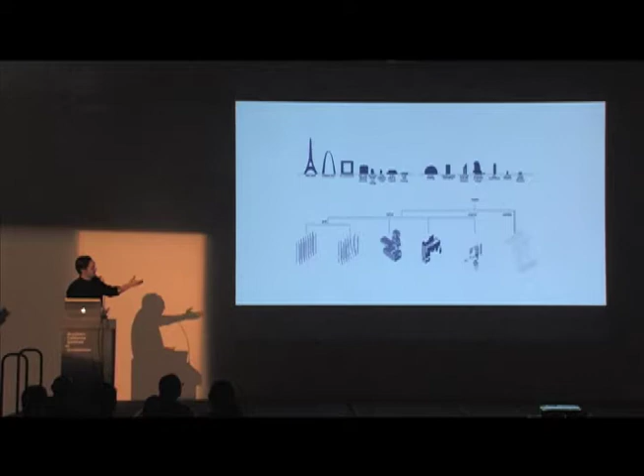We got an honorable mention, which is basically the jury's way of saying 'interesting idea, but there's no way we would ever do that' - which is ironic because they didn't actually end up building anything anyway. The winner didn't go on to build it either.

This was right about the time that Scott and I parted ways, and I went out on my own. Like so many people in this moment, I started to get work in China, and I got that work through a big landscape and urban design firm called SWA. They hired me as an architectural design consultant.

The very first project I worked on - I say we because there are always collaborators in the office, regardless of whether you have a partner - there was a decommissioned cement plant in the district of Qingpu, outside of Shanghai, and they asked us to do a study to look at possible reprogramming and an architectural proposal for the cement plant.

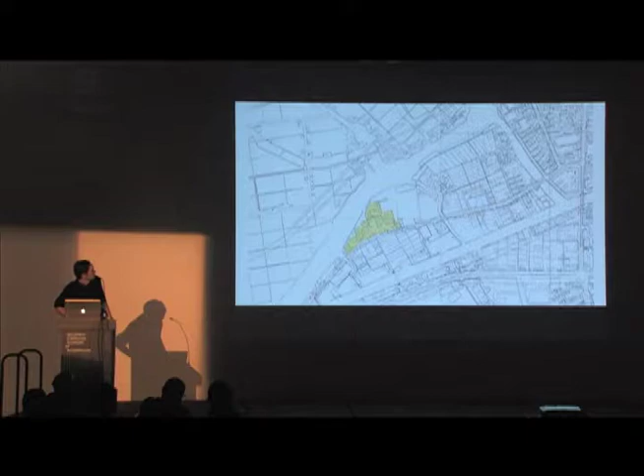It was, I want to say, about a couple 100,000 square feet. And it looks something like that.

So when the client tells you that you have 200,000 square feet to work with, we felt it was a good idea to go ahead and make a proposal for 1.2 million square feet, actually proposing for the entire island - which SWA was incredibly receptive to. We created a new simple zoning plan where we zoned about a third of the island for cultural use, with a band for housing, a major vehicular spine moving through, pedestrian connections, and a major pedestrian connection.

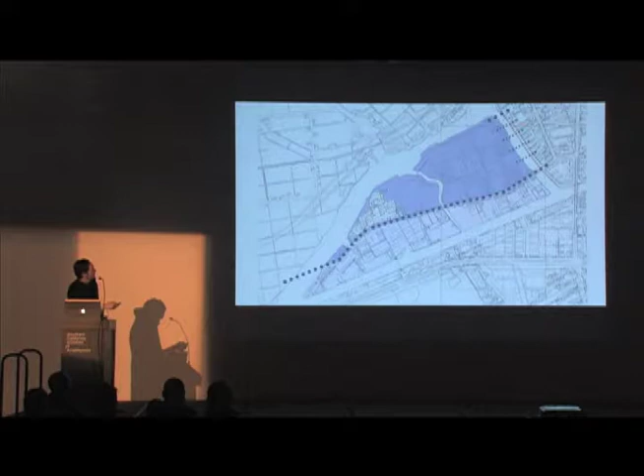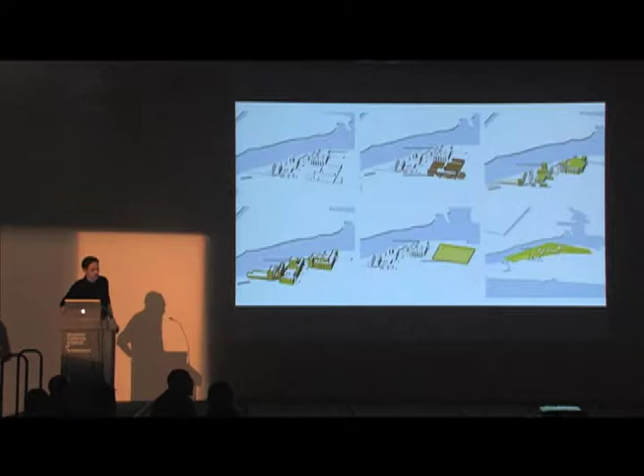At the same time, we were looking at different ways of dealing with the cement plant itself. In one instance, we'd leave the cement plant intact, like a post-industrial relic, and add program. In another, we'd insert program inside. Another would wrap it, negotiating between the two. In one it would be demoed with all new program, and another would have a big encompassing roof plan, like Tschumi's at Le Fresnoy.

So this was actually the result. It's interesting - while so many of my peers in the profession were getting stuff built so rapidly in China, our proposals for China somehow never got realized. So we had the golden touch on this stuff.

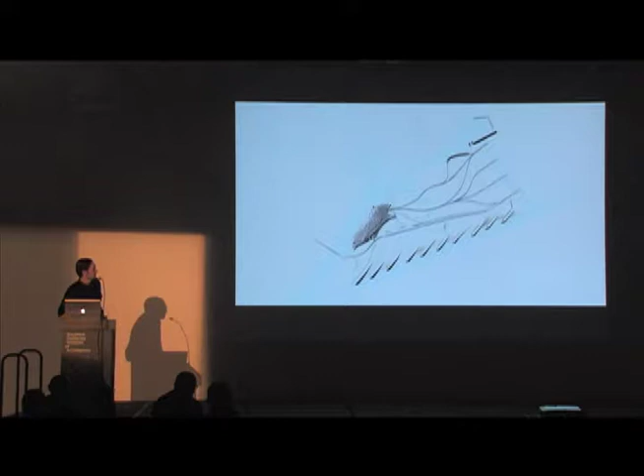So a little bit down the way in Qingpu as well, we were commissioned to look at a park and a series of pavilions within it. At this point we were really interested in the idea of the park as a kind of deformation field. There was a pagoda in the park that was a point of interest throughout, so we did a series of pavilions or tea houses that referenced the pagoda and referenced this deformation field we had created based on those relationships.

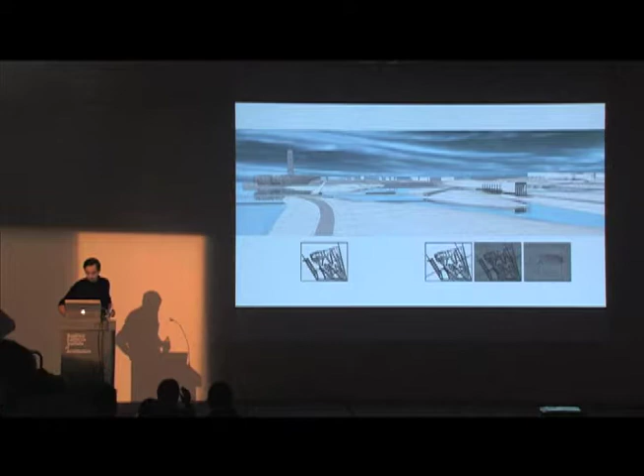We actually made it to DD on these things, and we worked with Arup on the curvilinear screen structures to form a bent steel pipe system with teak cladding. We had pages and pages in the DD set describing the curved rib relationships, along with Excel spreadsheets describing all the relationships. But again, as happened with some of the work in China, it just fell into a black hole and nothing ever came of it.

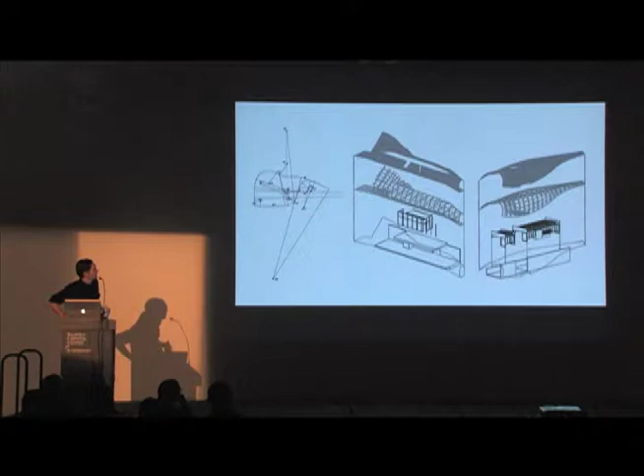This was my installation in the gallery at SCI-Arc, and I think for me this is a really key, really important project in the trajectory of my career.

It's a little bit of a blessing. It was an amazing opportunity. It also makes me feel like a one-hit wonder—it's the one thing everyone can agree on. They say, I loved your installation. Everybody says that more than anything, which should be a compliment, but I'm so insecure I always feel like what they're really saying is everything else you've done is total shit. Not that I don't want to be complimented, because I do appreciate it, but let's keep going.

At the time we did the installation, I collaborated with my former partner, even though we had separated. I was really interested in this idea of ubiquity and the everyday, and the beauty of the everyday—the fact that there are opportunities in architecture that surround us but are continually overlooked. One of those was this kind of Mad Men moment, this 1960s drop ceiling, which is absolutely ubiquitous, it's everywhere. So I thought we could use the drop ceiling as a framework for exploring patterns and exploring a condition of a surface.

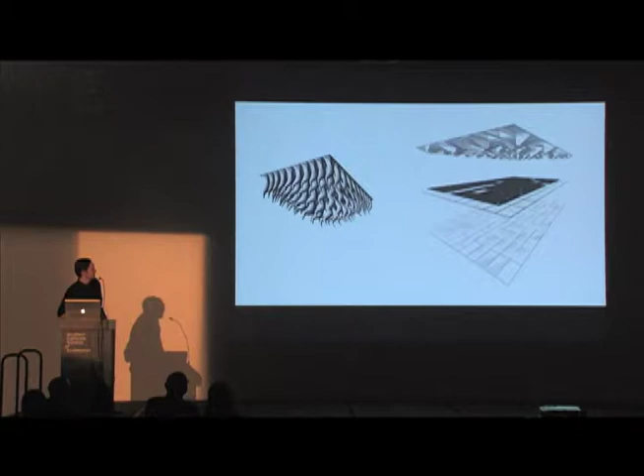But I'm still going to do the other one at some point soon. So we created what we called space scores—a kind of double binary set of options for each unit or cell, meaning it could be set in one position or mirrored, or flipped upside down and mirrored from that. We also dropped them onto the floor as part of it, using a set of operations to create these space scores.

The thing was up for 9 weeks, which was in the summer—I think that's a bit longer than they actually stay up—but we actually went in and manually changed the exhibit every week for 9 weeks. So if you came at a different time, you would see a wholly different thing. That's just a kind of annotation of the space score, unit by unit, and then those are the results over the 9 times.

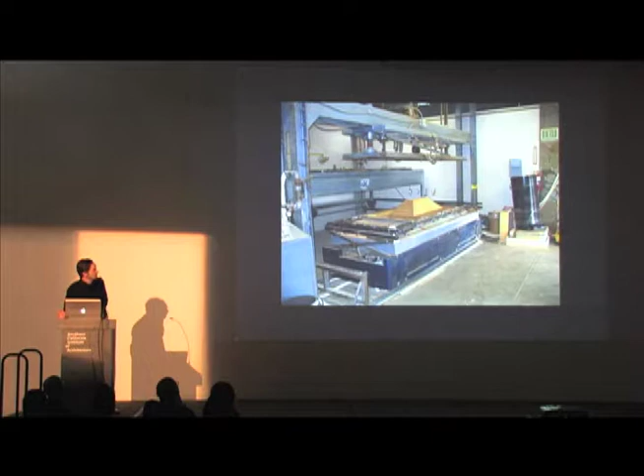One of the things I think was amazing about this project is that we did everything here. We made a couple bucks or molds for vacuum forming, and we vacuumed all 121 parts here at SCI-Arc. We did some R&D with a company of specialists who did 3 or 4 and showed us the tricks, which was really helpful. Then we pulled all 121 parts here—we may have pulled 150 to get 121, but we got our 121 parts.

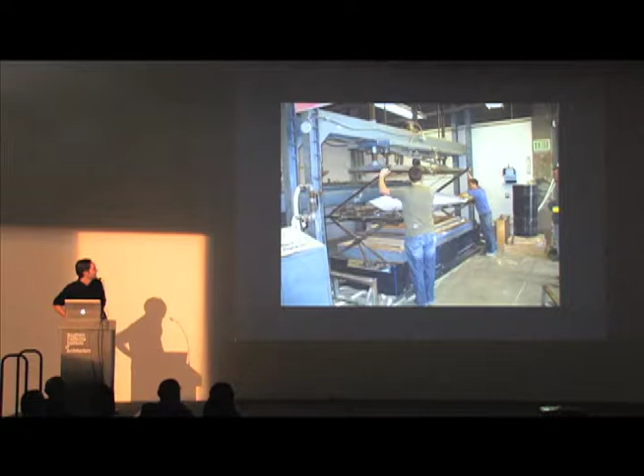And that old—I don't know how it's still working—but that old dinosaur of a vacuum form machine was absolutely perfect. It was brilliant.

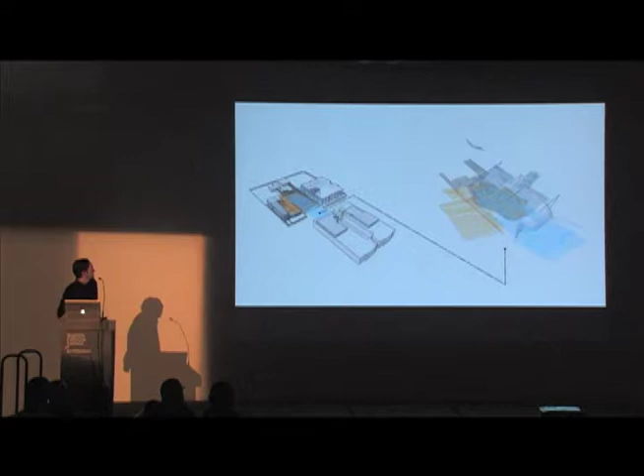This is a diagram of that reconfiguration of the program. The other thing we did was a simple building height relationship analysis and view plane analysis, and we used it, for better or worse, to build up this surface that became a kind of crusty protective shell around the existing house.

At the same time, we did some analysis of the landscape, the garden plan, and I was really interested in working that and mining it for possible patterns. At the time we were using Voronoi script, which we never actually used again for a number of reasons, but I think it was an interesting experiment.

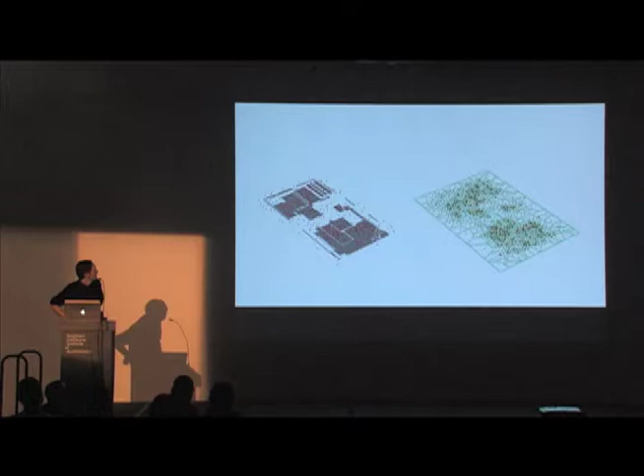We started to explore what that pattern might mean in relationship to a new kind of lightweight structural shell. At the time we were conceptualizing this lightweight space frame, and had a number of vertices coming together that at the time was impossible. But now, thanks to Alexis, I actually think I could build this thing with Alexis's robot joint.

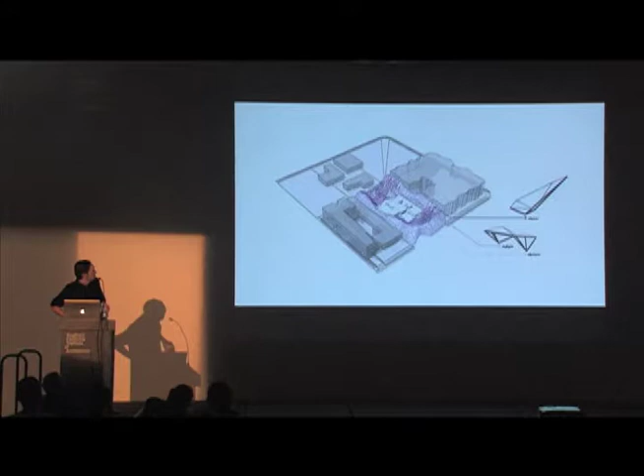This is a cutaway section showing how we explored the possibility of the lower level and this crusty shell encapsulating the house. This is as far as we got, but we did a slope analysis to decide whether the shell would be pathway, garden, or skylight. Obviously this is not a super respectful treatment of the existing house.

So the next thing I want to talk about is a series of residential projects that were happening in the office in much more recent timeline.

This project is interesting in that it was an existing one-story residence, but once you get up to the second level, you actually have sweeping ocean views in both directions because of the shape of the landform in Dana Point, because of the point.

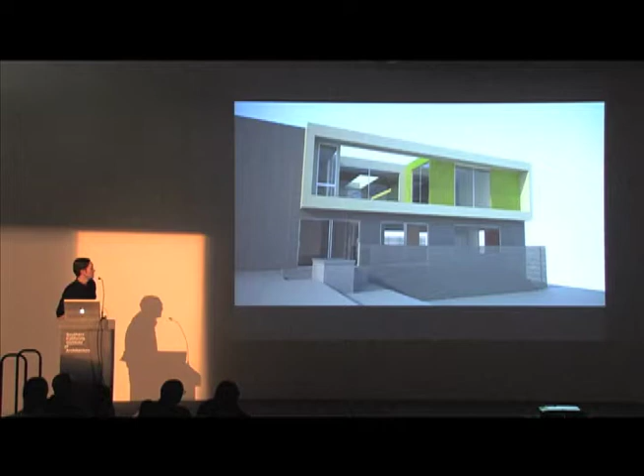So this was the proposal. It's really a very simple modernist proposal, which in and of itself was actually a really tough sell, but we got there.

And then this was the kind of renderings for the interior and the exterior. I'll talk a little bit more about this later on.

So this is something I've talked about before, but I'm sure any architect or anyone in architecture school has had the experience where you tell someone you're an architect, and the uninitiated's response is always, 'Oh, really? When are you going to design your dream house?' I don't know what they picture when they ask that, but it's clearly not what you're picturing or what your reality is.

My wife and I actually purchased a piece of property in Mount Washington in 2005 to build a house on, and it's no dream house, let me tell you—it's a reality house. It's a 2-to-1 slope, a substandard lot, only about 4,000 square feet. It's a difficult site in kind of a crappy neighborhood, to tell you the truth, because that's what we could afford. So it wasn't our dream house by any stretch of the imagination.

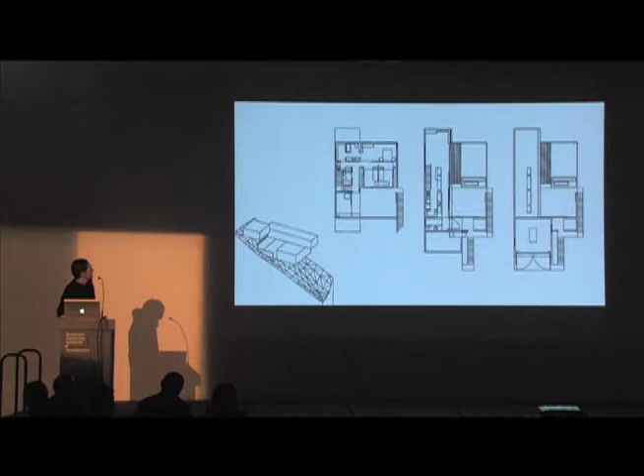But anyway, I wanted to show this — I think it's actually the better of the three or four schemes we did. You enter on the upslope at the garage level, and kind of enter under the garage into the main space. The public space is this long, thin bar, only 16 feet wide, which holds the kitchen and living space, and sits on top of a more rectangular chunk that holds all the bedrooms and forms a kind of roof deck.

So that's the rendered version of that scheme. The site's not quite as steep as it looks, like you're flying in an airplane, but it looks cool in the portfolio.

So these projects were all happening at the same time. This is another residential project for a couple, about 2,500 square feet in Escondido, California. Let's see — you can spot the architect house here. So that's the actual project.

This one actually did get built, although pretty severely compromised. Part of the reason I show the aerial is to give an idea of what we were up against — there's an ocean of these faux mission-style homes, as far as the eye can see. We were in an architectural review board controlled neighborhood, meaning the neighbors have to approve the work you do, and suffice to say, they want you to do all the things that are already in the neighborhood.

So we got rejected a lot — many times we went through the process and were rejected. But eventually we came around to something that would work. Let me go to the plan here.

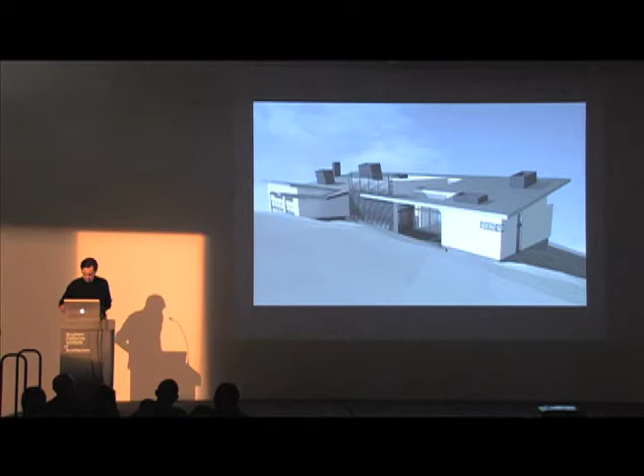And then we did that, and it was unanimously approved. I don't know if you can tell, but it's the same project.

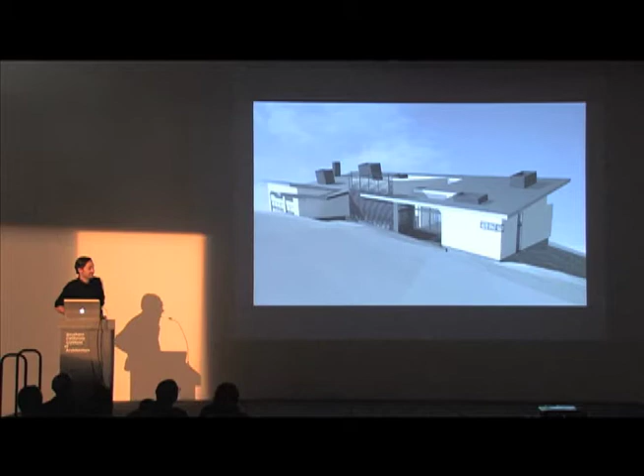But as you'll see later, this doesn't always work. We got it approved, and the house actually did get built, which was good. But all the exterior screens and material changes and all those things we absolutely drew the shit out of were cut from the project, unfortunately. With that said, the shell and spaces are really good, and the clients are incredibly happy.

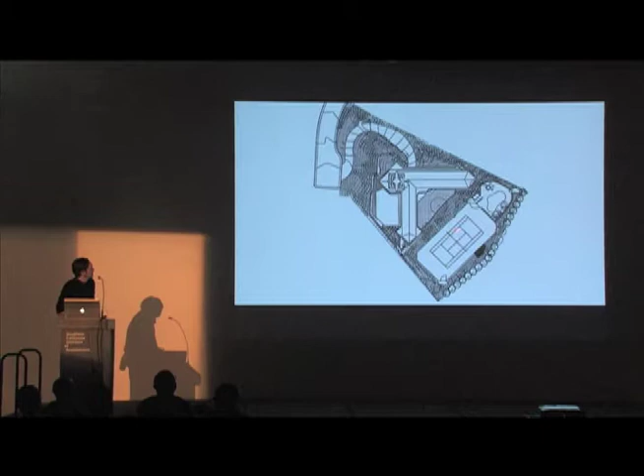So that's the kind of result - the restoration of the original house, and then the new cushion of greenery. One of the things we did, in addition to redesigning all the landscape, was to create this decomposed granite and corten pathway that loops all the way around the site, so you can actually experience the whole site, which you couldn't do before.

So this is an amazing, absolutely incredible house. One of the things we wanted to do is bring it back to its original vision, which wasn't the case when we started - the house kind of floating on this cushion of landscape and appearing to hover. It's actually set into piles in the mound, but you can see the twinkling lights of Redondo Beach beyond. You learn a lot when you work on a project like this, in terms of fits and finishes, but also the geometry and the siding - it's a really incredible project.

So the next project is for the same client, when they just couldn't bear anymore the 180-degree views of the ocean, and had to get away from it all. They actually go to Ojai, California, and own a property there as well as the one in Palos Verdes. They asked us to look at their existing getaway property in Ojai, which is here - again, another spectacular site. I think the original zoning plan had the land broken up into like 20-acre parcels. This project is like half an acre, because it was actually broken up prior to the ordinance. But what it affords is that when you're here, you have amazing views of all these orchards and the entire valley beyond, which runs east-west. You really feel like the property is kind of limitless in a way, which is pretty amazing.

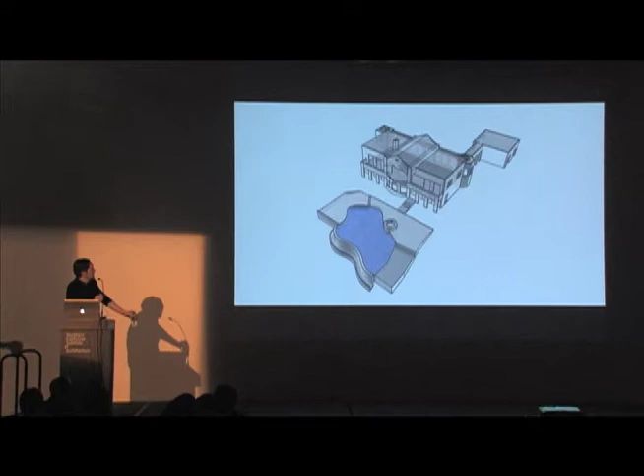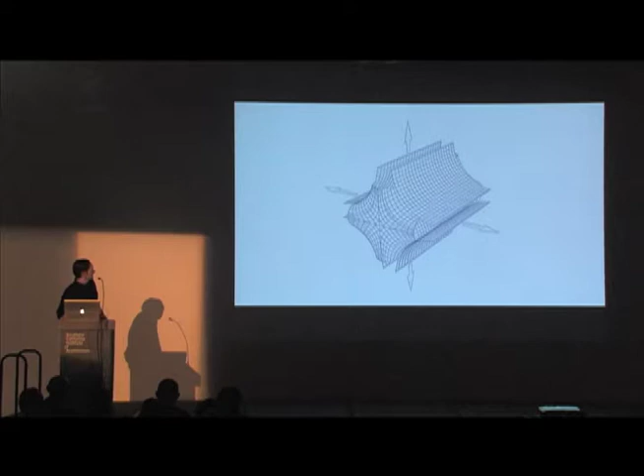At the time, we were looking at different geometric constructs and minimal surfaces, not as a model for modeling the house specifically, but as a way of thinking about the space. So we were looking at cross troughs, and we made up this thing we called the double cross trough, which allows for penetration up and down, and side to side directionally. It became a model for thinking about the spatial connections of the house.

So in the design, we just blew up the Postmodern Misfit. We kept the infrastructure on the base, which was retained and set into the hill, and then redesigned the upper part entirely to work within that framework. One of the things we did, in addition to the whole upstairs, was to move the garage and tuck it under the house to get more of the landscape.

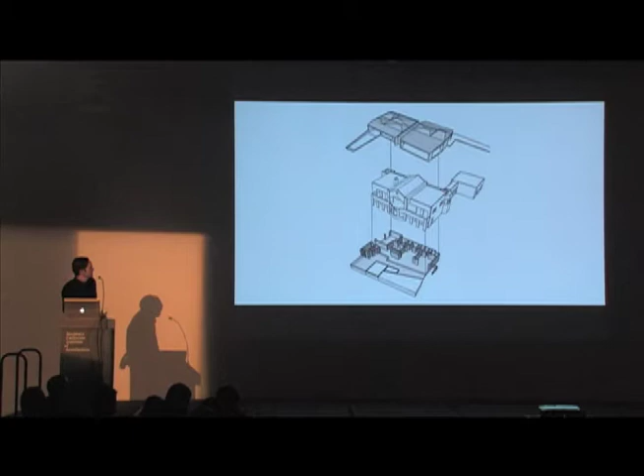So basic diagrams showing the way the new scheme would work in terms of programmatic breakdown. We would have private spaces on this side of the upper floor and public spaces on this side, with still private in the bedrooms below. So natural ventilation, circulation, and then back to the plan.

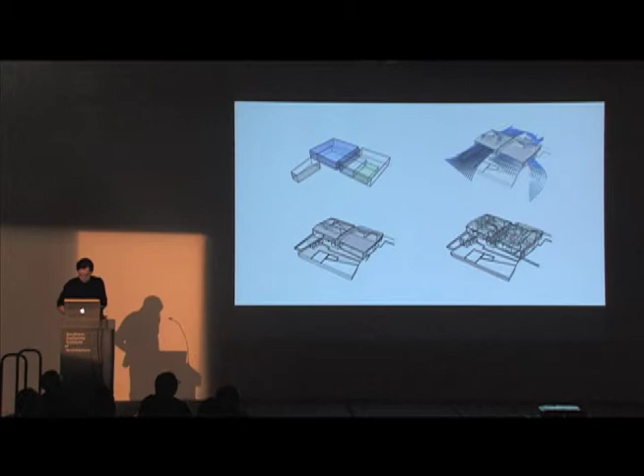Base level plan, and then the upper level with the spaces breaking down the way I was describing. So in addition to the house and the site, they actually commissioned us to design a detached office across this ravine, and also a small guest house.

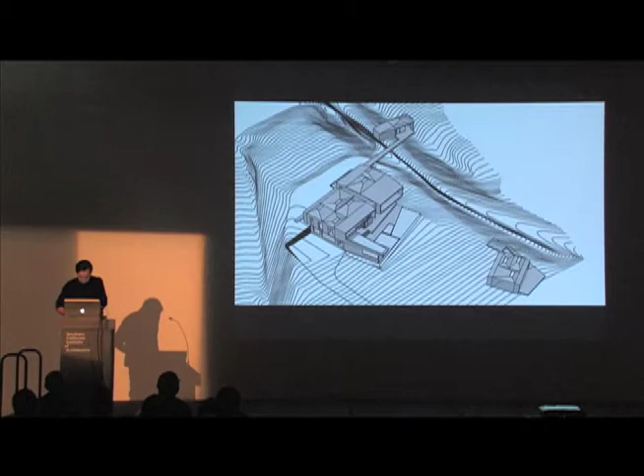And then I think this is the last residential project that I'll show. And again, all these things were kind of happening at the same time.

So through SWA again, we were hired to look at a development in Krasnodar, which is in southern Russia. The idea of the development was that the developer wanted to create a kind of resort community, but also wanted to bring golf to Russia, which I don't know if that's a good idea or not. They don't have golf in Russia, or they didn't at the time, so they wanted to create a big golf course with a ton of residences around it, kind of vacation getaways, but the developer hoped at some point they'd turn into permanent homes for residents.

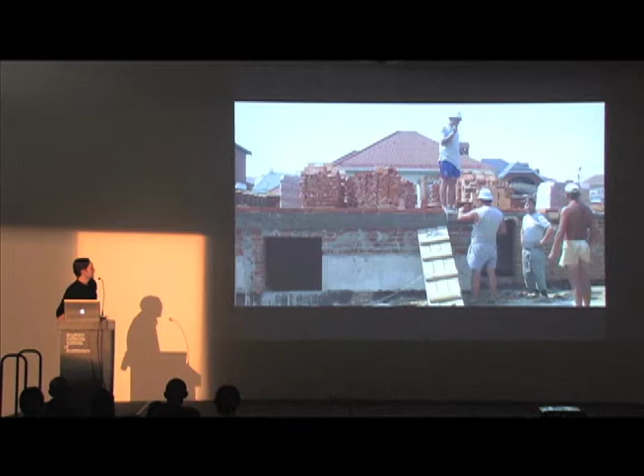But beyond just the nature of the crew is the nature of the construction. It's masonry, very poorly done, entirely masonry, and they were creating these dense, heavy structures with very minimal openings in a climate that's not so dissimilar from ours. Actually it's a very wonderful climate they have. They're not very far from the Black Sea. It's in the southern part of Russia.

So to me, it's a weird evolution of a type where the construction technology trumps, in a way, the reality, let's say the ecological realities of the place.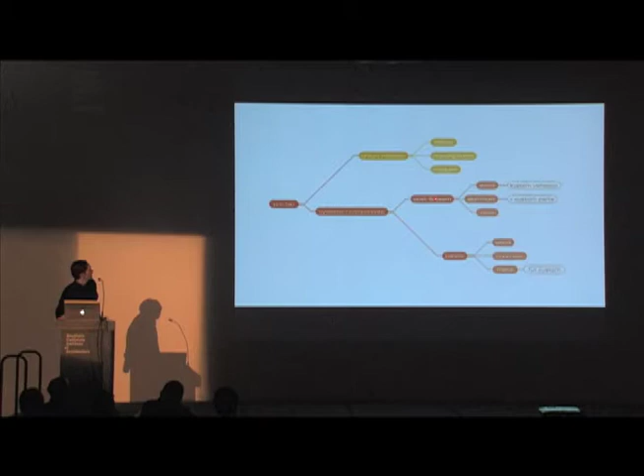So the client asked us to look at prefab, which I have to say made me cringe a little bit, but definitely a lot less than that. The thing about prefab is that when you say it, it's hard to know what someone means by those words. So the first thing I did was to educate the client about what prefab actually is. We talked about a system, a kit of parts approach versus a unit or module approach, the possible results, and the material and tectonic realities of the different systems.

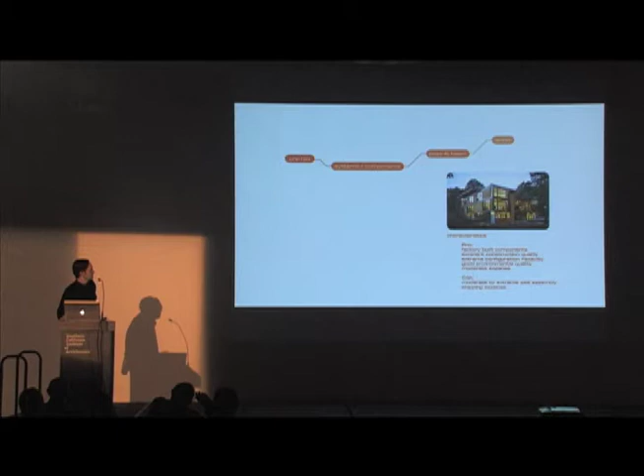The client was really excited that we engaged Empyrean, the kit of parts company that had done the Dwell Home. Empyrean was incredibly supportive and great to work with, and they're excited about partnering with architects, but I really knew we didn't want to do the next Dwell Home.

But that's okay. What we did was set about educating ourselves on the system, the absolute requirements of the Empyrean system. It's really simple — a simple post and beam system with panelized or unitized infill. And then they have these really strict criteria about what you can do with the roof.

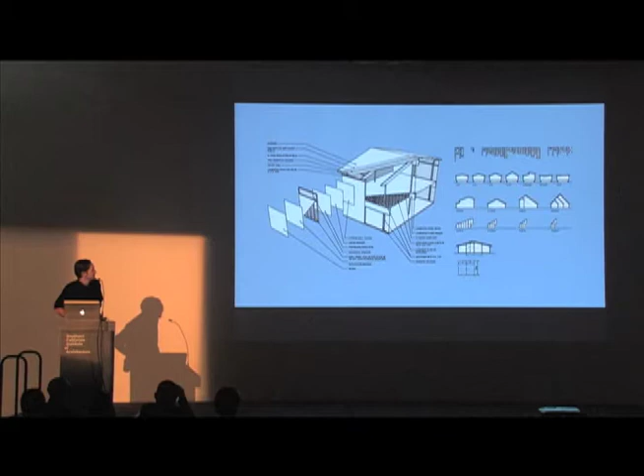So obviously the first thing we explored was working with variability in the roof pitch, maybe creating something with more of a profile of a continuous ribbon, which Empyrean was absolutely thrilled about — they said it works with our system, all systems go. So we showed these things to the client, and they didn't like them.

Well, they did, but they said people wouldn't like them. So we were struggling. I thought back to my experience with the Garrison residence, and thought maybe if I show them something a bit friendlier, they'll like it.

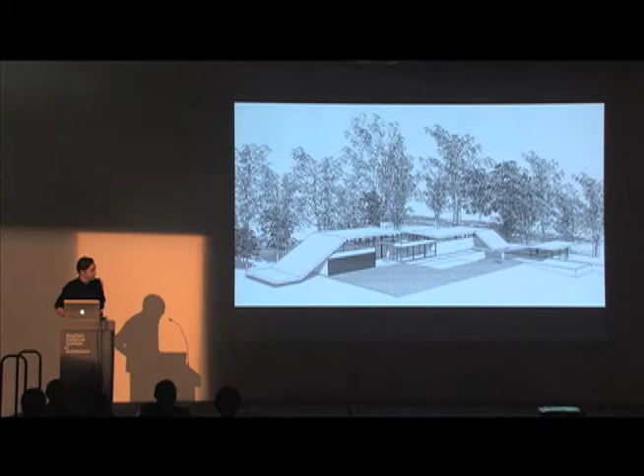So we started to show them these things which I would never show my peers, but here I am showing my peers. We showed them things that were a bit friendlier, populated with people and trees and those things. But the design obviously isn't changing at all.

Little did I know that everything was also going to stop all at the same time. So I did that, and then we got that. So let's take a survey. We had these six projects all going at the same time, and among many other things, at different scales, but this was the kind of core of the work.

This project actually got built, but the funding was cut during construction, so they built the shell, but all the screens and finishes and things never made it into the project, or at least not yet. My project, we were actually unable to procure a loan for, so that project is kind of on permanent hold, although I still have a piece of property in Mount Washington, which I'd be happy to show you if you're interested in buying something.

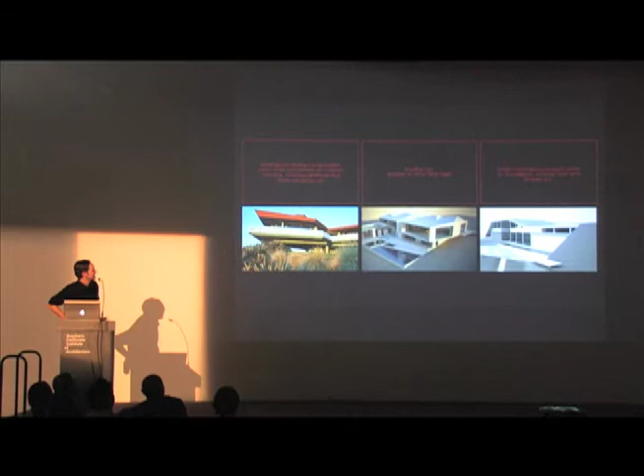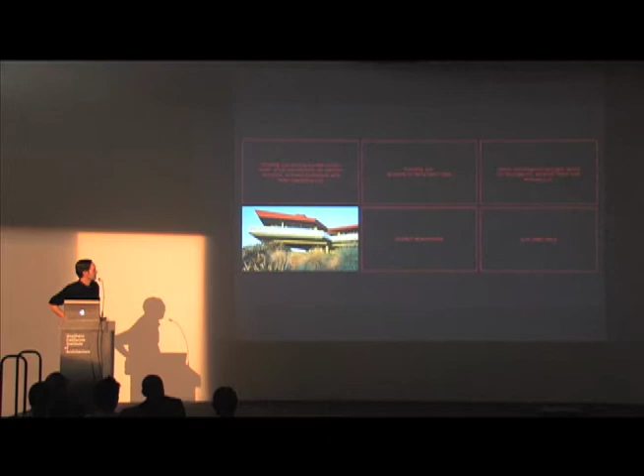This project got built, obviously, but was really severely compromised. But it is what it is. These are all kind of learning experiences. This one was abandoned completely. They're actually selling the property, and that one we just plain got fired. So the preservation project is the one that had a full budget and remained intact, but no real kind of design fingerprint there.

So then that's it, everything stopped. And in the media, I don't know if you remember, everyone was talking about all the companies that were too big to fail. It's funny how a set of words kind of takes hold, and you don't really know what it means. So I thought, I wonder what that list looks like.

And then I thought, well, what kind of companies are exactly the right size to fail? And I had at least one answer right at the top of my head.

I started to think about smallness in a way at first in a kind of silly way, as a direct opposite of what they were talking about in the media. But obviously, when you run a business, there are financial realities, and getting small on the business side is easy. It's just math. It can be emotional, but you just have to make sure that you don't have more going out than you have coming in.

It's simple. But what I thought was more interesting was maybe to take an opportunity to think about the work, and to think about my own interests, and things that aren't driven by clients or all those other things. That work's important, and I'm an architect who wants to build. That's why I do what I do, so I'm not saying I wanted to avoid that work, but it gave me an opportunity to think about what does it mean to do something small, or what can smallness be about?

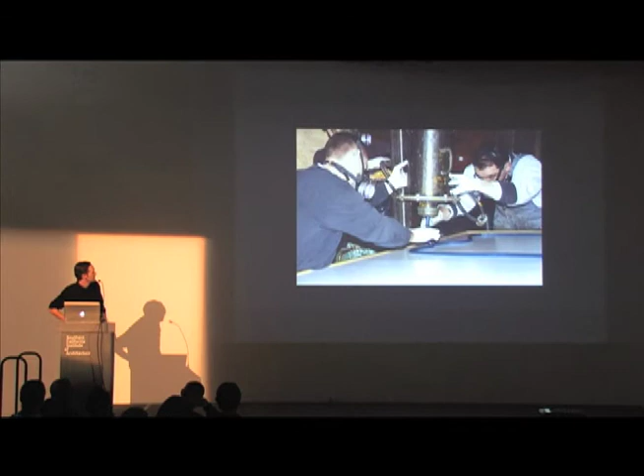So this is me in the left-hand corner, the human robot. Before we were doing things with robots, we were extruding resin from this kind of industrial machine to make these tables in the shop. That's me again, kind of setting it. And then that's the result.

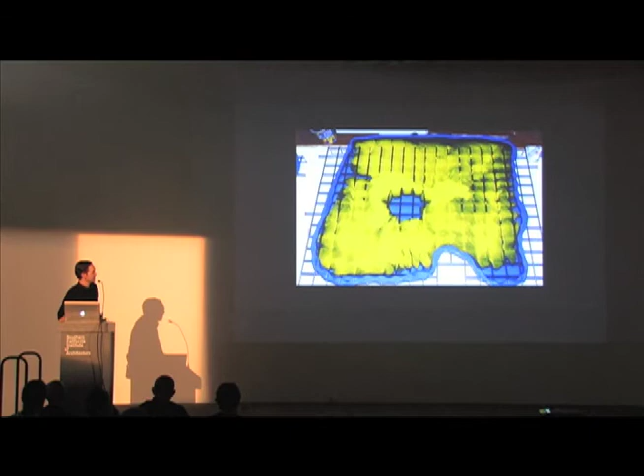It's not that I ever want to make anything that looks like that, because I don't. But the thing that amazed me about Pesce's work is that it cut absolutely across all scales. He was making, designing, and prototyping everything from stuff the size of a plate to things the scale of a building, and everything in between. These are things that I would like to strive for.

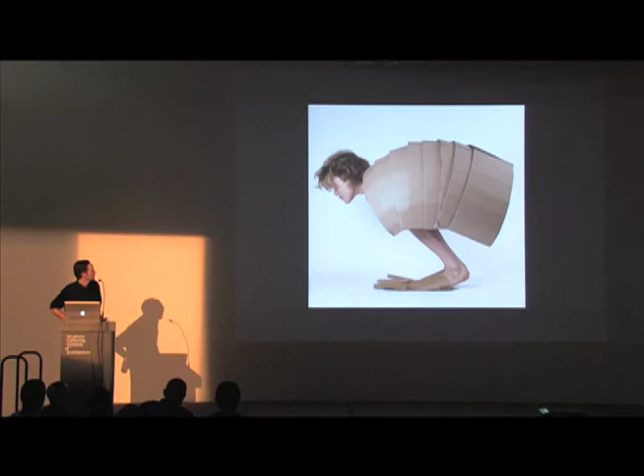I think that's my favorite. Again, the materials are so mundane, and the transformation is absolutely complete in a way. So there's a speculation about kind of futures, but there's also a kind of playful reckoning with the present that I find really fascinating. So a series of quick sketch projects in the realm of smallness.

How am I doing on time? Am I over? Am I over? It's 10 after? Okay, I'm going to roll. I'm going to rock this out right now.

So one of the things I'm working on is what I'm calling an energy gazebo. I was actually working on a canopy for a residential exterior space, and I realized that this was a form that you had to reckon with. I actually absolutely despise gazebos for all the reasons that maybe people despise them, but I felt compelled to work on one.

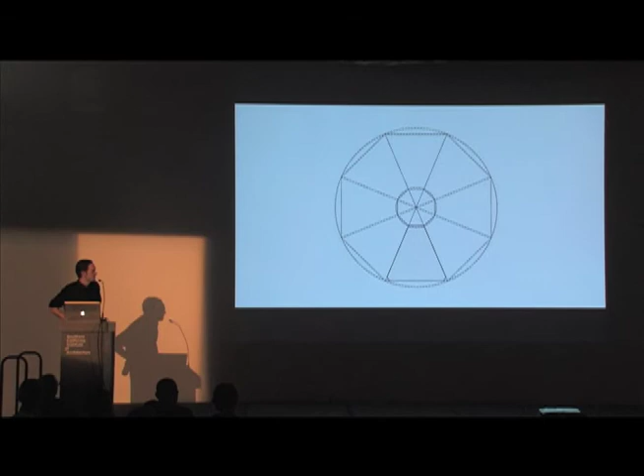So that, coupled with a current fascination with PV technology—this is called solar ivy. It's something my students introduced me to, and it's not commercially available yet, but it's a combination of PV and piezoelectric. So the leaves collect energy from the sun's rays, but also kind of flutter, and the vibration creates energy as well. So we set about working on the type of the gazebo, analyzing the parts of it to see what that might mean.

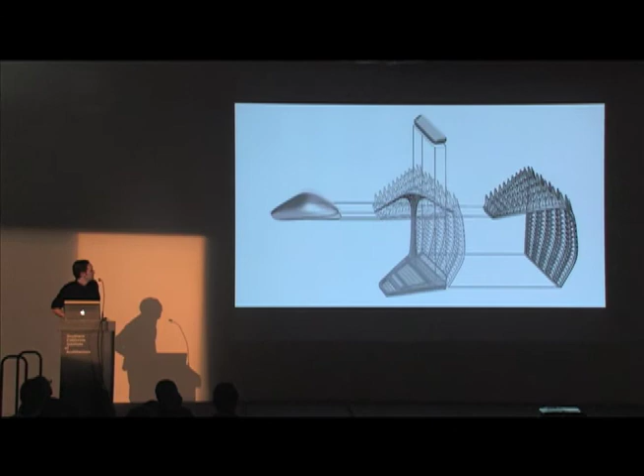So a piece for collecting water, a bench, and then the skin populated with these solar leaves, and then working on simple patterning routines to explore both the rationalization of the skin and also the performativity of it—so the size of the aperture, and the length and orientation of the leaf.

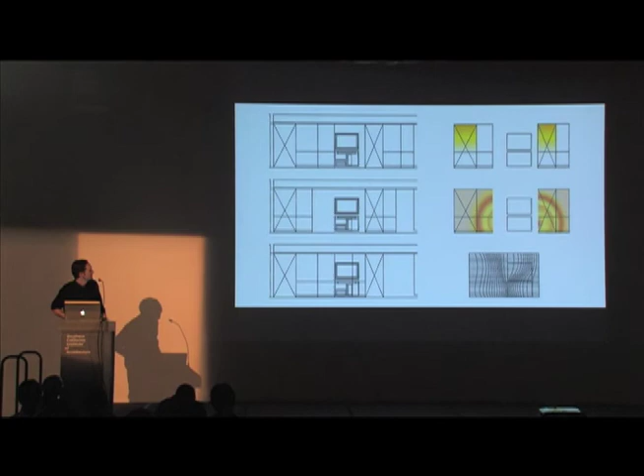This is another small project, called sound field panels, and it's really about dealing with two opposing forces: one being the need to gather light from adjacent space, and the other being the need to actually block the sound. And so these diagrams are about that. I'm sorry, I'm going to go quickly now.

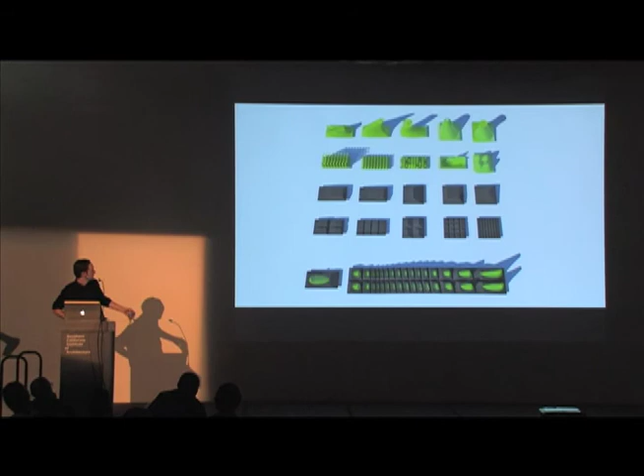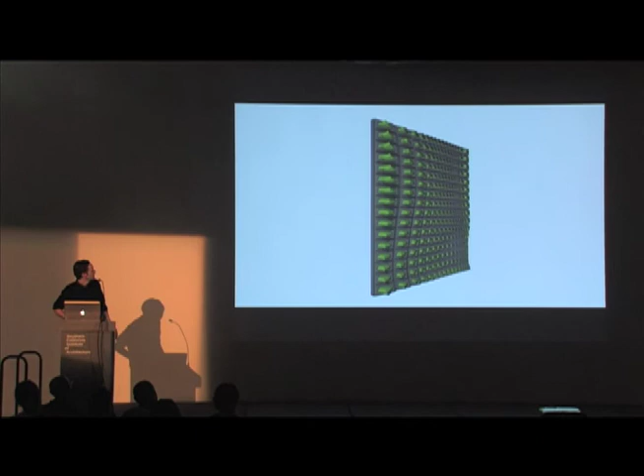So this is our first pass at reconciling the opposing forces, and then an exploration of the panelization or unitization, and again, like way back in San Jose, a combination of two different systems—one to block the sound, and the other to admit light—establishing through Grasshopper a paneling routine, with one thing Booleaning out the other. That's the thing in the space.

And then the smallest. So I know this is—you have to forgive this.

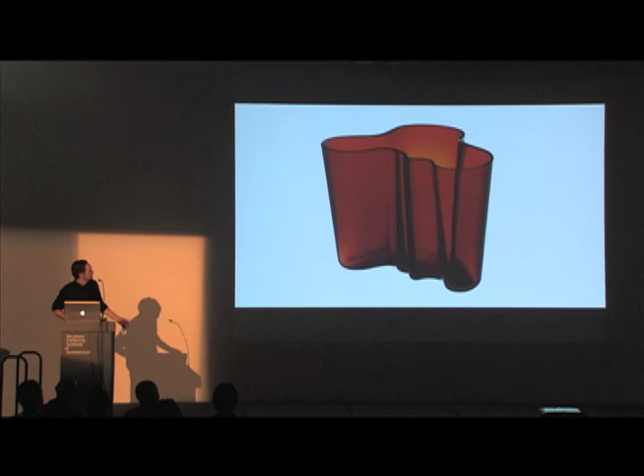I know this is the stuff that online tutorials are made of, and I acknowledge that, but I've always wanted to design a vase. I've always been in love with the Alvar Aalto vase, obviously, but it actually doesn't work, which is really interesting. The geometry and form is really compelling, but if you've ever used one, it doesn't work terribly well as a vase. And then we wanted to look at the kind of typical, simple bud vase.

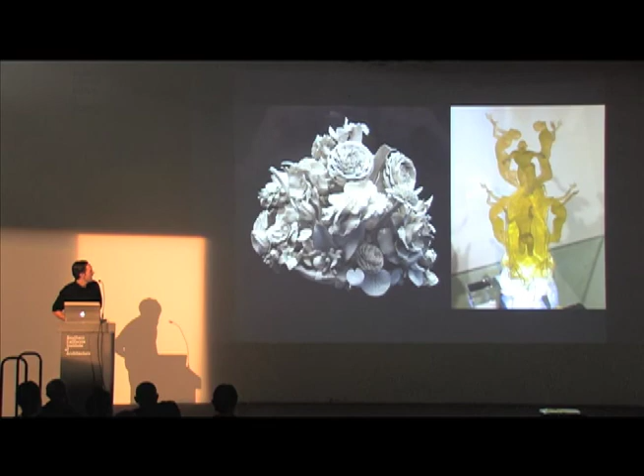But the thing that I wanted to do—for materials, we were looking at porcelain and then direct output resin 3D printing. But what I was really interested in doing is designing a series of smaller vases that could actually aggregate into a larger set of vases. So it could be a big thing via its aggregation.

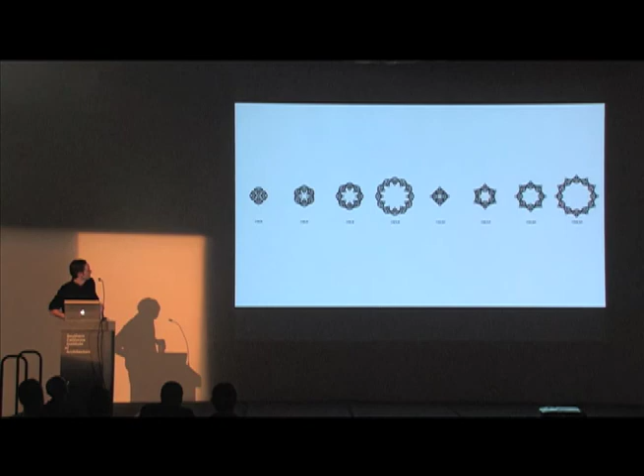So we started by designing a bud vase. The indentation is about the relationship to the hand and the way you might grip it. So going from small to big—this is a longer, taller, thinner one, and then a doubling of that, and then looking at possible configurations or relationships of those things.

I'm going to go through this pretty quickly because I know we're out of time. So Hernan always talks about the Ramones, which I think is fascinating, and he says that Ali Rahim once compared him to the Ramones because he does the same thing over and over again, I think, which is interesting. I think the Ramones are amazing.

I think when I think about his work, I think more about Charlie Parker—virtuosity and intensity and innovation and density. And when I think about my work, not to say that I'm comparing myself with a musical icon, but in the realm of 'if you were a tree, what kind of tree would you be?'